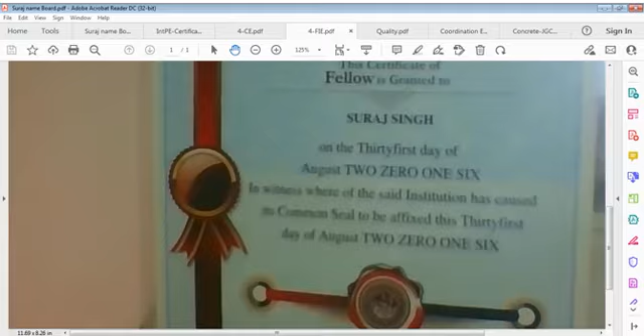And also this is Chartered Engineer certificate issued by Institution of Engineers and the provisions of Royal Charter of Institution of Engineers India 1935, and this is Membership Fellow FIE certificate, which is linked to corporate membership, which are AMIE, MIE and FIE. All titles are related to Chartered Engineer India use title.

Everybody has this authority to use, and this is quality file, which speaks of quality a lot. Quality is a must, and this is coordination file, and this is your reference file for standard specifications for concrete, and this relates to Japan specifications of concrete.

Meanwhile, I close this file Chartered Engineer India, and I also close this file Fellow of Engineers here, and I come back to quality issue, which is very important, and I talk on behalf of people of this country.

Bharat India speaks about. I'm not speaking on behalf of government, I'm not speaking on behalf of myself. I speak as far as quality is concerned on behalf of people of this country who must get quality for what they pay, but they are not getting.

And this is coordination issue, which means coordination engineering is a question mark, and engineering coordination both are same. Projects is talks of, and what we say that we must understand quality issue, we must understand what is quality, how it works, and what relation we have got.

And we say Bharat India speaks. And of course, if I say no, for timing I say Bharat India, I hide, and then I say quality and coordination. And quality and coordination are very important issues, which we can say, which apply.

These two issues apply everywhere, on every work, on every material, on every process in entire world. And I can say, of course, I can't say quality is not good everywhere. It may be good or may not be good.

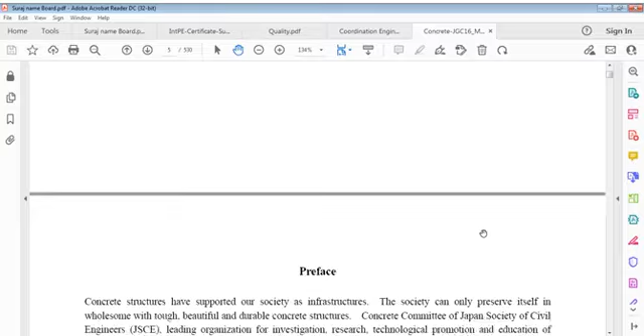For example, I by chance took this file, specification of concrete. This is a Japanese specification and it gives a lot of information—standard specifications for concrete structures, 2007, Materials and Construction, from the Japan Society of Civil Engineers. I was just referring this to you for additional knowledge. I have not gone through this file, but let us move on to understand what we can get from this. That information is very useful.

I talked to you about the index of this, and now we are somewhere here—what we are discussing in the first way. Yes, it was flow of work. We discussed planning related to design. Planning leads to designs, and designs lead to construction and maintenance.

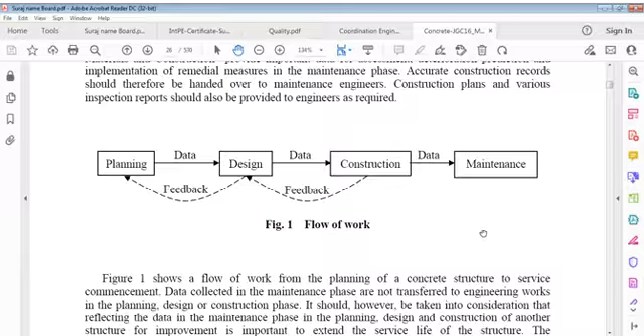Now, planning here is not project planning; it's a different kind of planning. We have to first decide what we have to do, and if in its initial stage we understand and can afford this project, then it's okay—we go to designs. When designs are ready, we go to construction, and once construction is ongoing, it goes to delivery of the project and maintenance. This is called flow of work, which is very common.

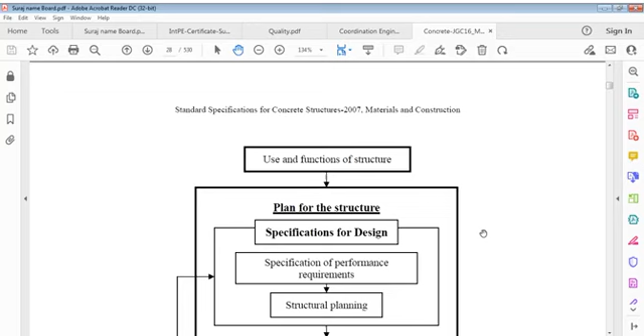There are standard specifications for structure design giving all these specifications which we can hand over. Also, this is a flow chart—our plan, which is the flow chart we discussed yesterday, of work steps described in specifications for designs. What is design specification? This was very clear.

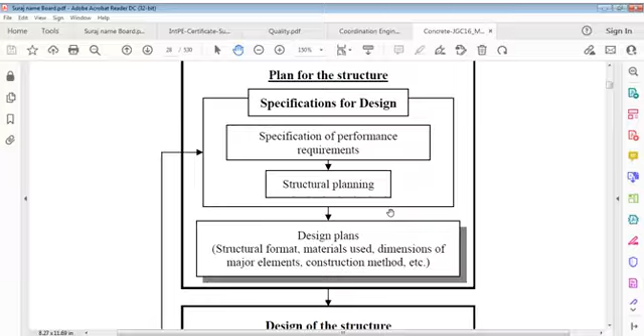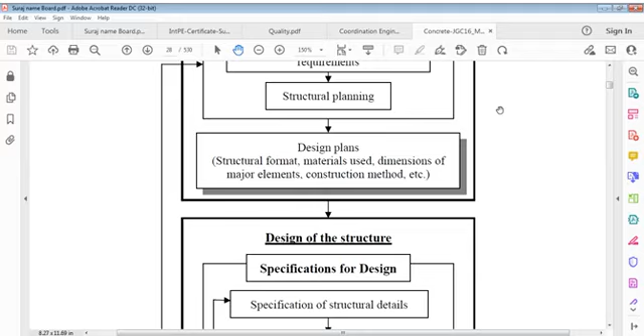You have to understand: the use and function of structure is the plan. It says that the plan for a structure, specifications for design—there you must have specifications of performance requirements, structural planning, and all these specifications for designs cover performance requirements and structural planning. Then it goes to structural planning, and after that to design plans, which means structural format, materials used, dimensions of major elements, construction method, etc.

Then we go to design of structure. Here is a plan for structure—meaning we planned in this way, using specifications for design, specifications of performance requirements, and structural planning, and we design plans. Then we go to design of structure. What should it be? How should it be?

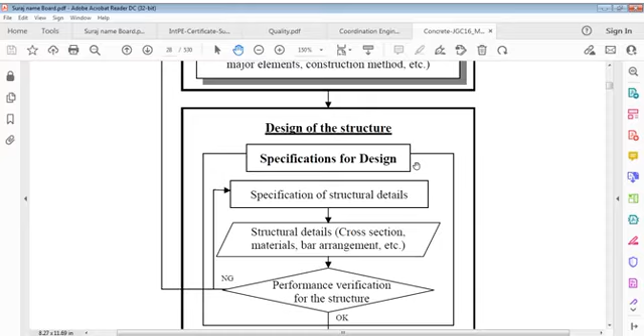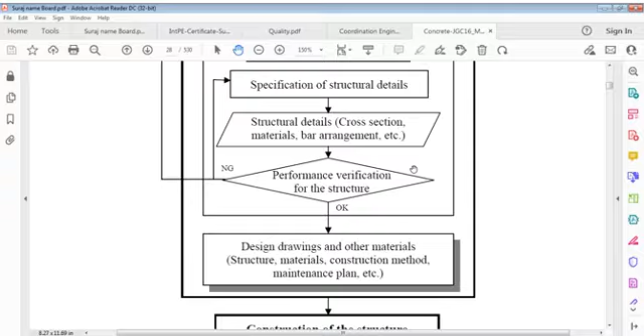Specifications for design must include specification of structural details, cross-section, materials, bar arrangement, and performance verification for structure—that's the coverage. Then once everything is known and performance verification is done, we produce the delivery item: design drawings and other materials, structure, materials, construction method, maintenance plan, etc. This then goes to implementation, called construction of structures. This is the work steps described in specification for design.

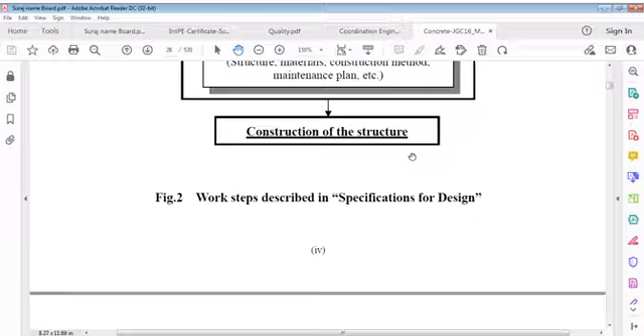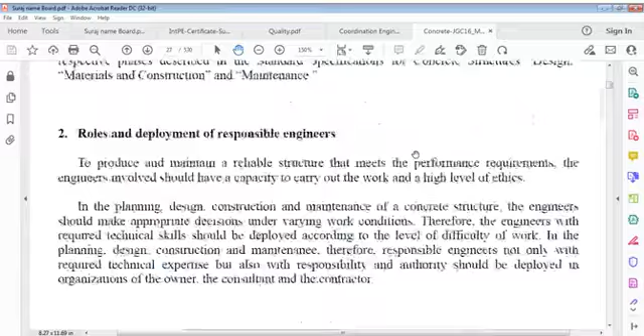Flow of work. In flow of work, we have gone through and understood the process of design, what the various processes are, and also the role and deployment of engineers, as we said. This is also a very important point, and it's important to say just in brief.

I remind you, engineers must produce and maintain a reliable structure that meets performance requirements. Engineers involved should have the capacity to carry out work and a high level of ethics in planning, design, construction, and maintenance of a concrete structure, making appropriate decisions under varying work conditions. Therefore, engineers with required technical skills should be deployed according to the level of difficulty of the work. Responsible engineers should have not only required technical expertise but also responsibility and authority, and should be deployed in organizations of owners, consultants, and contractors.

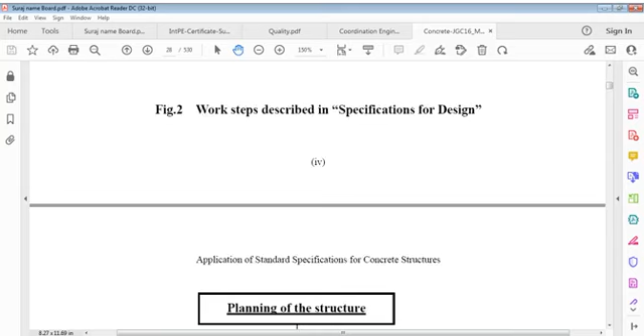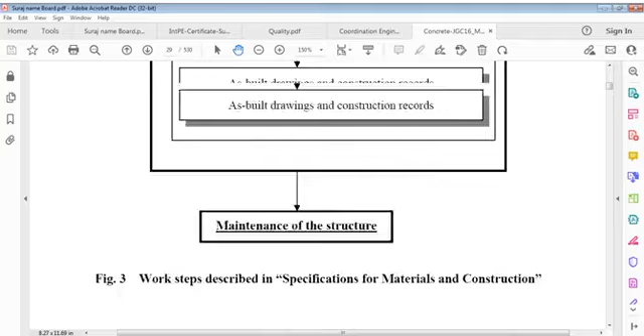And then we can say this is a design flow. After this, we go to planning of the structure. Then there's maintenance of the structure, and work steps described in specifications for materials and construction. Here, planning of structure we've done, design of structures we have done.

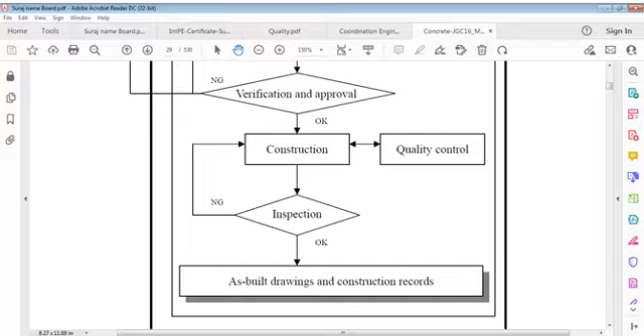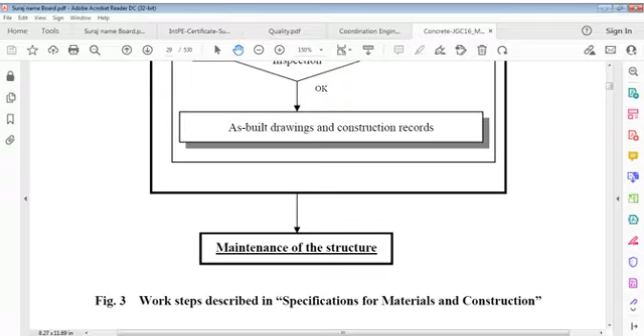Then we start construction of the structure, which covers specifications for materials and construction, planning, verification, and approval. After verification comes construction, which is also linked to quality as well as inspection, because inspection is generally a part of both construction and quality. Once constructed, we go to as-built drawings and construction records, which follow up. Then maintenance comes into view, and that's the flow.

The other part here in this graph is work steps described in specifications for maintenance. This means it's not construction, it's maintenance specifications. Though in our world of construction we don't often focus on it, it's still a part of the work. It says planning of structure, meaning design plans.

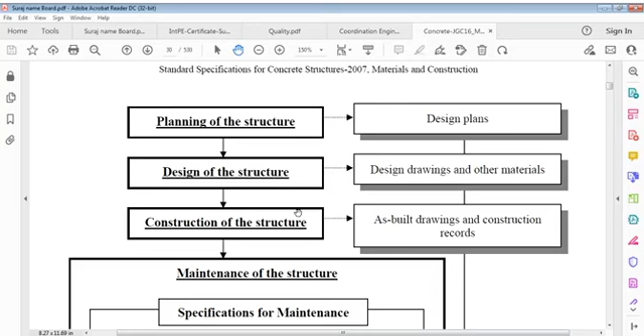Planning of structure gives you design plans. Design of structure gives you design drawings and other materials. Construction of structure gives you as-built drawings and construction records. So these are deliveries: design plan is a delivery, design drawings and other materials are a delivery, as-built drawings and construction records are deliveries. Design plans are delivered by planning of structure, design drawings and other materials by design of structure, and as-built drawings by construction of structure.

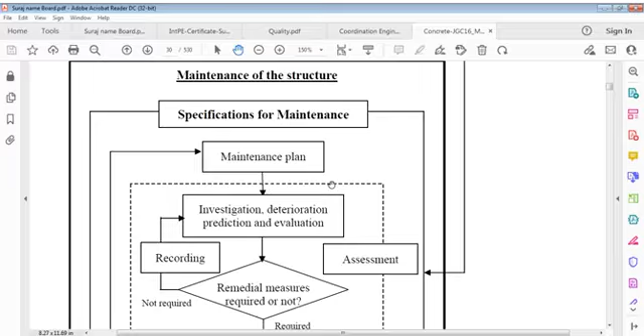Then it goes to maintenance of structure. Now we are talking of maintenance, which covers specifications for maintenance. What are these? Specifications of maintenance cover the entire scenario: investigation and deterioration prediction and evaluation, that is the maintenance plan - what shall we maintain. This takes us to remedial measures, required or not required, which it will tell us.

The investigation shall be based on records - we need recording here and assessment both. Then we determine what is required and what's not required - that's remedial measures, which we have to see in maintenance. It's necessary or not necessary depending on the age of the structure and how it works - whether it's new or old, or retrofitting is required, or rehauling is required, or a new structure is required. There's not just one remedial measure - there can be many, depending on so many factors. And we can say storage of maintenance records.

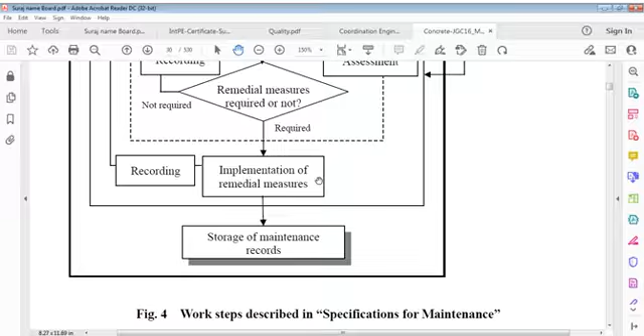Just like we say as-built records, we can say storage of maintenance records. What we maintain must be on record, so that it can be helpful in future - it's really useful. So that's work steps described in specifications for maintenance.

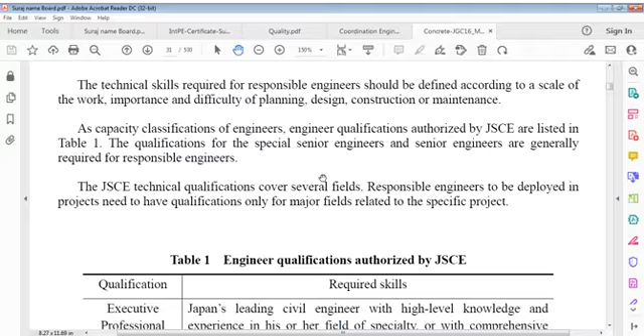Now, technical skills for engineers - what these must be, we have studied that. It should be engineer's qualification authorized by the Japan Society of Civil Engineers. What it should be: qualification for executive professional senior engineers, considered lead engineer or authorized engineer, then senior professional civil engineer, then professional civil engineer, and associate professional engineers. What are the expectations of society from them?

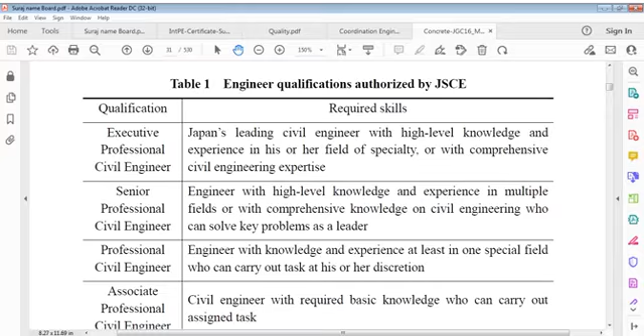Executive number one must be having the highest level of knowledge, and senior must have independent knowledge, multiple fields knowledge, as well as being a professional civil engineer with good engineer's knowledge and experience in at least one special field. An associate professional means someone with required basic knowledge, a civil engineer who can carry out assigned tasks - that's the start of life as a professional. Then you move to senior professional level with multiple fields experience, a kind of coordination engineer. Then the highest level is executive professional engineer, Japan's leading civil engineer, with high level experience in the highest field.

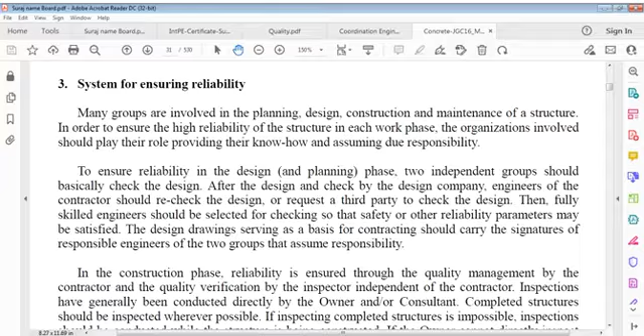That's just an indication of what level of competency one should have in a system for ensuring reliability, which is a very important part in the world of engineering. Without reliability, we can't do anything. Many groups are involved in planning, design, construction, and maintenance of a structure - it covers all these phases. In each workplace and each work phase, organizations involved should play their role, providing know-how, respecting know-how, and assuming due responsibility. Assuming due responsibility is the most important part.

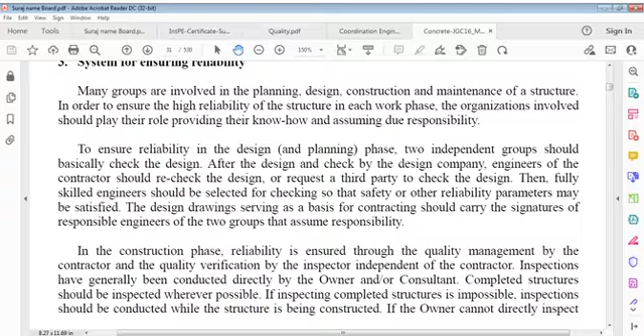To ensure reliability in the design and planning phase, two independent groups should basically check the design, so that it remains reliable with full confidence after design and check by the design company engineer, or engineer of the contractor. Engineers of the contractor should recheck once the design is delivered. The contract-employed engineer should recheck the design or request a third party to check it - we may call this a kind of review, proof checking, or reliability checking. Fully skilled engineers should be selected for checking so that safety or other reliability parameters may be satisfied.

Here we have design safety, work safety, and future safety - it's not just safety during work. Use safety means whatever we do, whatever product we deliver, in use it should be safe, and this should be for the entire life of that product.

Design drawings serving as a basis for contracting should carry signatures of responsible engineers of two groups that assume responsibility. That's an important part - it means it's not simply about checking, you also have to take responsibility for having gone through all this activity of checking or rechecking. You also become a stakeholder in this responsibility.

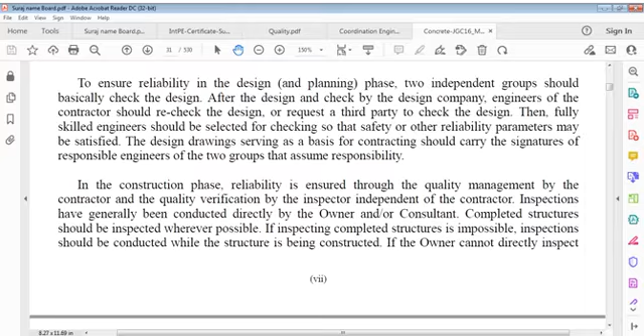In the construction phase, reliability is ensured through quality management by the contractor and quality verification by an inspector independent of the contractor. Inspections have generally been conducted directly by the owner or consultant. Completed structures should be inspected wherever possible. If inspecting the completed structure is impossible, inspection should be conducted while the structure is being constructed. If the owner cannot directly inspect the structure under construction, the owner may request an agent independent of the contractor.

Adopting as many highly reliable methods as possible can reduce the workers required for the work element required for quality organization, management, and inspection. In cases where adopting less reliable methods is inevitable, the level of quality organization management should be raised, or inspections should be conducted more frequently to improve reliability. Inspection items and decision criteria should be specifically presented at the time of contracting, because they greatly affect the quality of the structure and construction cost.

Ensuring safety requires regular investigations. When defects are detected, decisions should be made as to remedial measures. For decision-making concerning remedial measures for extremely difficult deformation, listening to the opinions of engineers with high skills who have experience in numerous cases is important. In order for a system for ensuring reliability to work properly, people or organizations with technical skills fit for specific work should be granted explicit responsibility and authority and assigned to the work.

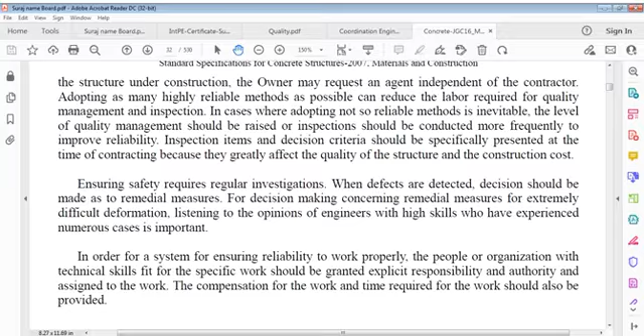Compensation for work and time required for work should also be provided.

General requirements. Now we come to general requirements. The contents of this book commence with chapter general provisions, which says standard specifications for concrete structures, that is materials and construction, general requirements, hereafter referred to as construction. General requirements of this specification describe basic concepts for construction of concrete structures specified in design drawings and specifications.

As a general rule, to construct a concrete structure, it is necessary to develop a construction plan based on design drawings and specifications provided. Within that contract, construct the structure in accordance with the construction plan while performing proper quality control or quality requirement compliance, and inspect the structure to confirm that it has been constructed in accordance with design drawings and specifications, and also good industrial practice. We can add that.

If it's not possible to develop a rational construction plan in accordance with design drawings and specifications, or whatever else is necessary to be included in that work, it is mandatory to revert or go back to the design stage and modify conditions set out in design drawings and specifications. This is very important content of this talk, a very important question. If your drawings and specifications are not implementable practically, that's a question mark.

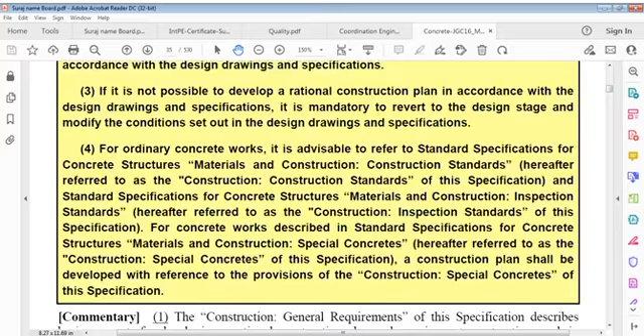Now a little commentary, let us see what it says. It says: construction, that is the general requirement of specification, describes basic concepts for developing a rational construction plan and carrying out construction work in accordance with the construction plan, in order to construct a concrete structure specified in design drawings and specifications, on the assumption that the structure has been designed appropriately so that performance requirements for the structure can be met.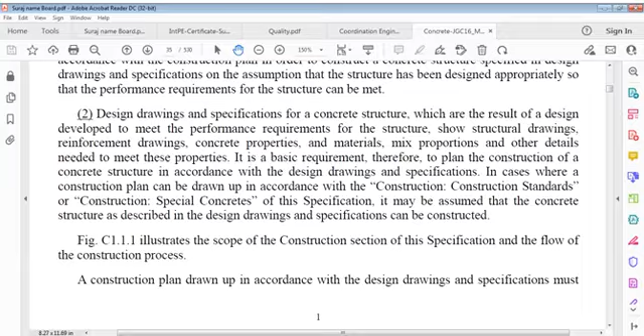Design drawings - this is about performance requirements for the structure to be met. This is an important point. Performance requirement means if it's not performable, there's no meaning to that. It is performable, that's what we say our target is. Design drawings and specifications for a concrete structure are the result of design developed to meet performance requirements for the structure.

Show structural drawings, reinforcement drawings, concrete properties and materials, mix proportions, and other details required to meet these properties. It is a basic requirement to plan construction of a concrete structure in accordance with design drawings and specifications. In cases where a construction plan can be drawn up in accordance with construction standards or Construction: Special Concretes specification, it may be assumed that concrete structures described in design drawings and specifications can be constructed.

There is a figure that illustrates the scope of construction. I will look at that after this.

A construction plan drawn up in accordance with design drawings and specifications must be confirmed and approved before construction is started. All tasks in the construction process must be performed in accordance with the construction plan after proper quality checks or quality examinations are done at each stage.

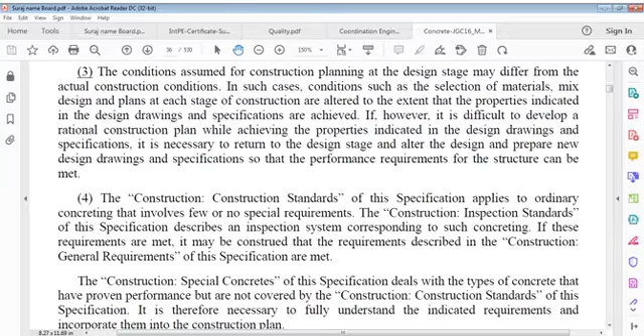Construction: Construction Standards of this specification apply to ordinary concreting that involves few or no special requirements. Construction inspection standards of this specification describe an inspection system corresponding to such concreting. If these requirements are met, it may be construed that the requirements described in the construction general requirements of these specifications are met.

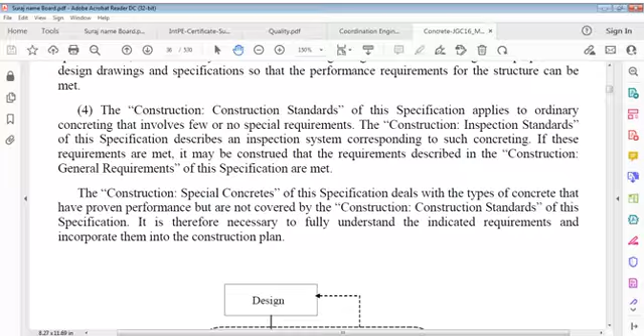Construction: Special Concretes in this specification deals with types of concrete that have proven performance but are not covered by the construction standard of this specification. It is therefore necessary to fully understand the indicated requirements and incorporate them into the construction plan.

Let's look at this figure. Here is design, and there is confirmed/approved, linked by a dotted arrow. Design goes to construction planning, and construction planning goes to confirmed/approved. These are linked together. There is also a larger dotted line covering many processes, in which confirmed/approved links to design and also to construction planning.

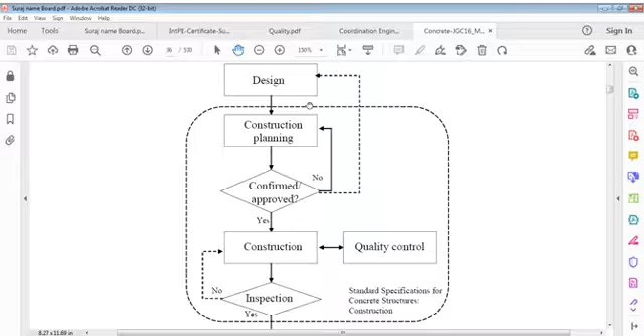If it is no, we have to go back to construction planning; if it can be done, we can say let us go to design. If construction planning is confirmed and approved, it goes to construction after yes, and construction is linked to quality control, and construction is linked to inspection directly. It goes back if it doesn't work.

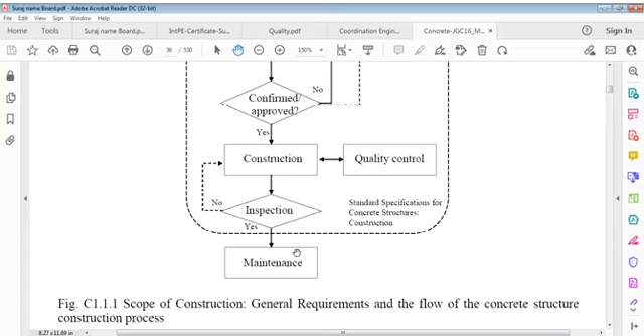Then it goes to maintenance after inspection, as per the standard specification for concrete structures construction: scope of construction, general requirements, and flow of the concrete structure construction process.

Now let's go to different definitions. Terms used in the standard specifications for concrete structures construction general requirements are defined as follows: verification, inspection, quality control, and domain engineer. Let us see one by one what it says.

Verification is the act of judging whether something meets performance requirements through experiments using full scale specimens, and through empirically and theoretically proven analysis methods. Inspection is the act of judging whether quality satisfies required criteria. Quality control refers to effective and organized technical activities for quality assurance of requirement performance performed at all stages of construction work, in order to economically construct a concrete structure that matches the required or intended purpose.

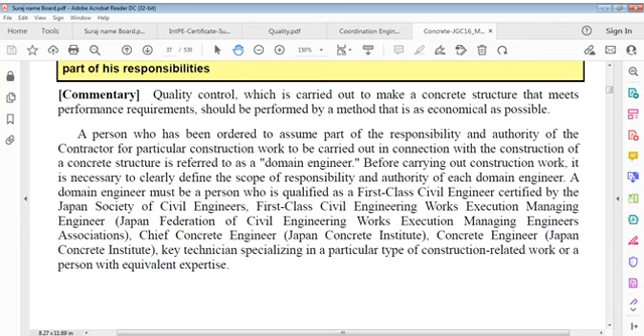Before carrying out construction work, it is necessary to clearly define the scope of responsibility and authority of each domain engineer. A domain engineer must be qualified as a first class civil engineer certified by the Japan Society of Civil Engineers, a first class civil engineering works execution managing engineer from the Japan Federation of Civil Engineering Works Execution Managing Engineers Association, a chief concrete engineer or concrete engineer from the Japan Concrete Institute, a key technician specializing in a particular type of construction related work, or a person with equivalent expertise.

Chapter 2, Construction Plan. What it says: an appropriate construction plan shall be prepared to construct a concrete structure indicated in design drawings and specifications. The construction plan shall meet requirements for the construction work concerned and be approved by the owner after it is confirmed that the concrete structure indicated in design drawings and specifications can be constructed.

So this is design approval in fact. This construction plan shall meet requirements for construction work concerned and be approved by the owner itself after it is confirmed that the concrete structure indicated in design drawings and specifications can be constructed.

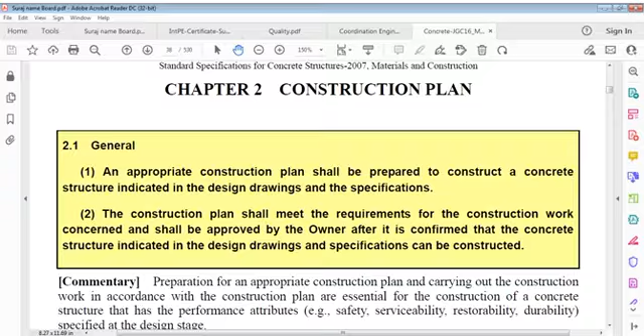There's a commentary on that also. Preparation of an appropriate construction plan and carrying out construction work in accordance with the construction plan are essential for construction of a concrete structure that has performance attributes, namely safety, serviceability, restorability, and durability, specified at the design stage. These are reliability coefficients, reliability attributes: safety, as we said before, serviceability, restorability, and durability, and in combination these can be called reliability.

This figure shows the flow of the process from design of a structure through development and approval of a construction plan to construction. In order to construct a concrete structure indicated in design drawings and specifications, appropriate concreting method and construction performance of concrete must be determined, and a construction plan is drawn up taking into consideration construction requirements, namely quality requirement, construction safety requirement, economy requirement, construction method or construction period, and environmental loading requirements.

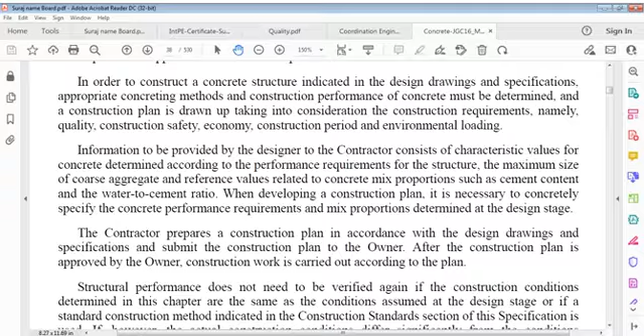When developing a construction plan, it's necessary to concretely specify concrete performance requirements and mix proportions determined at the design stage. The contractor prepares a construction plan in accordance with design drawings and specifications and submits that plan to the owner. After the construction plan is approved by the owner, construction work is carried out according to the approved plan.

Structural performance does not need to be verified again if construction conditions determined in this chapter are the same as conditions assumed at the design stage, or if a standard construction method indicated in the construction standards section of this specification is used. If, however, actual construction conditions differ significantly from conditions assumed at the design stage, performance of the structure must be verified again on the basis of actual construction conditions. If verification has revealed that the structure does not meet performance requirements, the construction plan requires to be altered according to the situation.

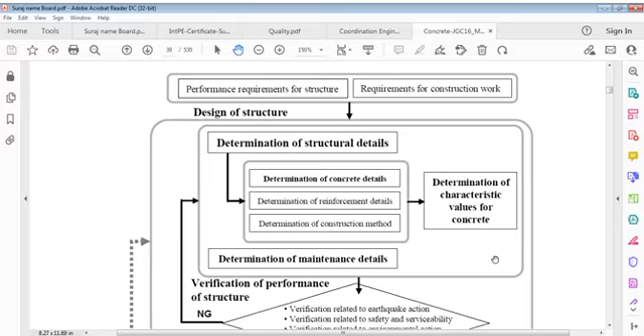Structural designs and construction planning, and this is here: performance requirements for structure and requirements for construction work, both. Performance requirements for structure and requirements for construction work are combined together, which goes to design of structure as overall and determination of structural details.

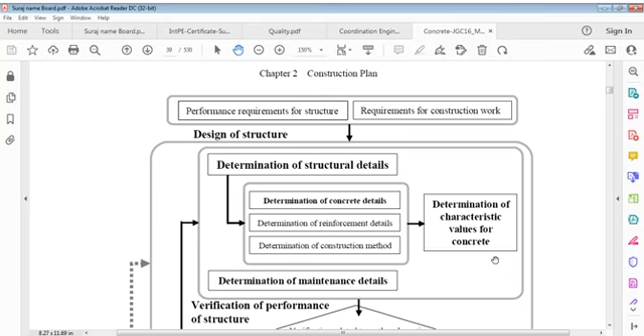Design of structure, and also you can say determination of structural details, which covers determination of concrete details, determination of reinforcement details, and determination of construction method. These three items go to determination of characteristic values for concrete. Determination of characteristic values for concrete. Now, determination of maintenance details.

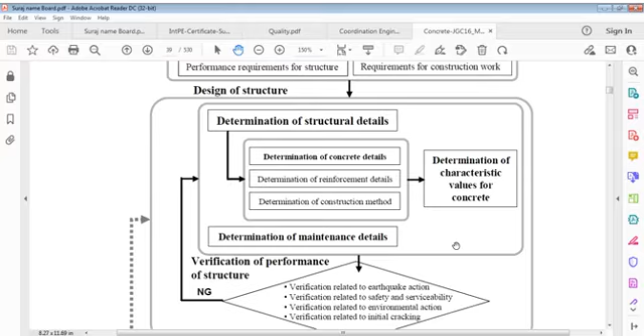This is for construction and designs, and this is for determination of maintenance details, which relate to design of structure and determination of structural details. It is verification related to earthquake action. Verification of performance is required, relating to earthquake actions, safety and serviceability, and environmental action related to initial cracking.

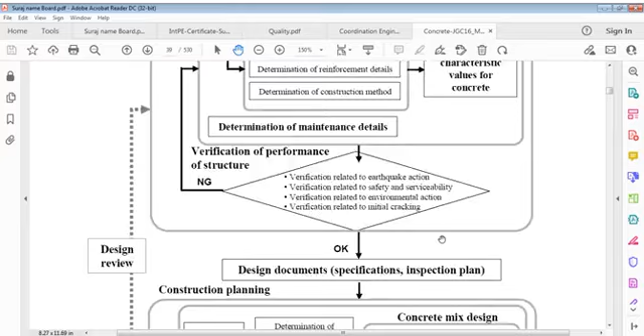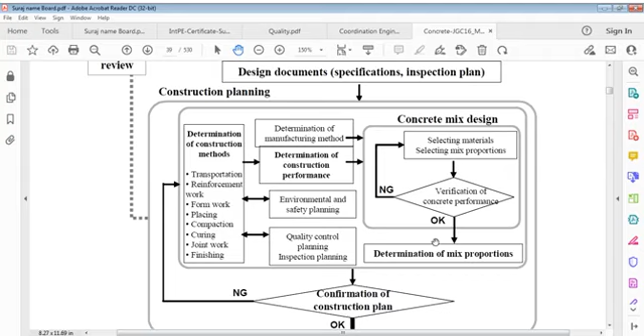These must be successful, and that is verification related to these items. If it is okay, it goes to design documents, specifications, and inspection plan, and all these come within the ambit of design review. This is linked above and below to design of structures, relating to design drawings, specifications, inspection plan, and construction planning.

After design documents, specifications, and inspection plan, it goes to construction planning. Here is determination of construction methods, which is linked to determination of manufacturing method, which is linked to concrete mix design. So determination of construction method, which is linked to determination of construction performance.

Determination of construction methods include transportation, reinforcement work, formwork, placing, compaction, curing, joint work, finishing. Construction methods: transportation, reinforcement work, formwork, placing, compaction or consolidation, curing of concrete, joint work, and finishing.

Determination of construction performance is linked to concrete mix design also. Determination of manufacturing method links to concrete mix design also. Then other items: environmental and safety planning, preparatory items, and post-concrete items like curing, compaction, joint work, finishing, all related to quality control planning and inspection planning.

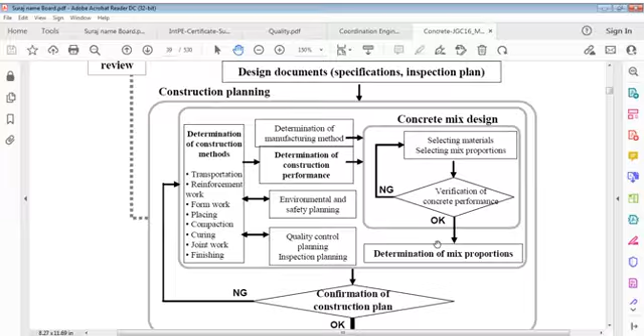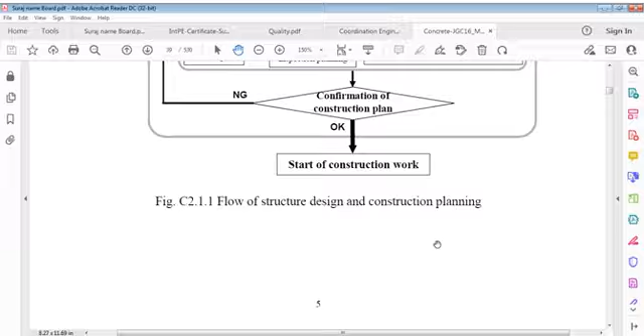Ultimately, concrete mix design involves selecting materials, selecting mix proportion, and verification of concrete performance, which after confirmation goes to determination of mix proportions, and confirmation of construction plan. Then we give final approval to start construction works. This is the flow of structural design and construction planning.

Considerations in construction planning. The construction plan shall be prepared taking into consideration environmental conditions and construction conditions at the construction site.

Giving consideration to construction safety and environmental loading, and developing plans for details such as overall schedule, construction methods, concrete manufacturing methods. There are four items here: overall schedule with many levels of tasks, construction methods, concrete manufacturing methods, construction performance of concrete, concrete mix proportions, quality controls, inspection, environmental impact and safety.

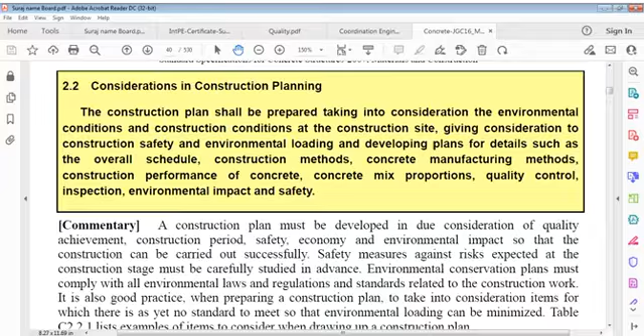There's a commentary also everywhere, let's see what it says - it can give much more benefit to make clear all these points. A construction plan must be developed in due consideration of quality achievement, construction period, safety, economy, and environmental impact, so that construction can be carried out successfully.

Safety measures against risks expected at the construction stage must be carefully studied in advance. Environmental considerations and environmental conservation plans must comply with all environmental laws and regulations, as well as standards related to construction work. It's also good practice when preparing a construction plan to take into consideration items for which there is as yet no standard to meet, so that environmental loading can be minimized.

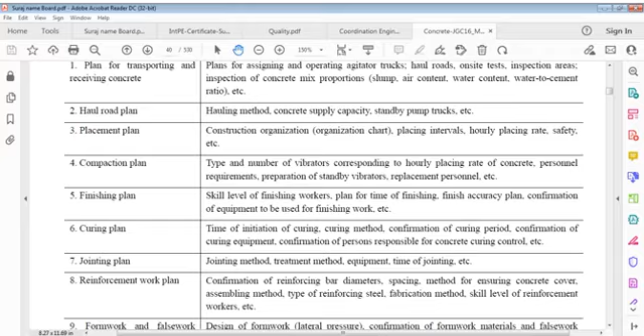There are certain examples here of items to consider when drawing up a construction plan. Examples of considerations in construction planning: plan for transporting and receiving concrete, haul road plan, placement plan, compaction plan, finishing plan, curing plan, jointing plan, reinforcement work plan, formwork and falsework plan, environment conservation plan, safety and health plan, others - about 12 items.

Same points as discussed before. This item is plan for transporting and receiving concrete - this is construction planning. Plans for assigning and operating agitator trucks, haul roads, on-site tests, inspection areas, inspection of concrete mix proportions, slump, air content, water content, water to cement ratio. Then haul road plan for concrete, hauling method, concrete supply capacity, standby pump trucks, etc.

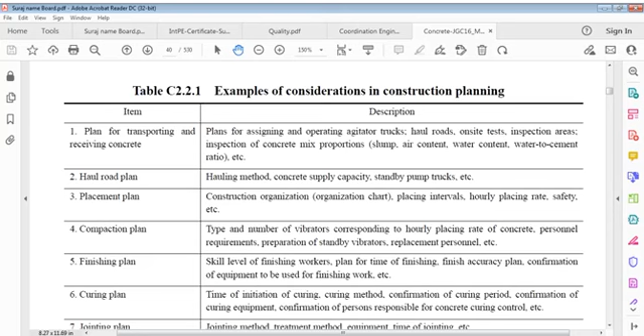In placement plan: construction organization, organization chart, placing intervals, hourly placing rate, safety, etc. That is the placement plan. Then compaction plan: type and number of vibrators corresponding to hourly placing rate of concrete, personnel requirements, preparation of standby vibrators, replacement personnel, etc.

Compaction plan it is. Then finishing plan: skill level of finishing workers required, time of finishing, finish accuracy plan, confirmation of equipment to be used for finishing work, etc. Then curing plan.

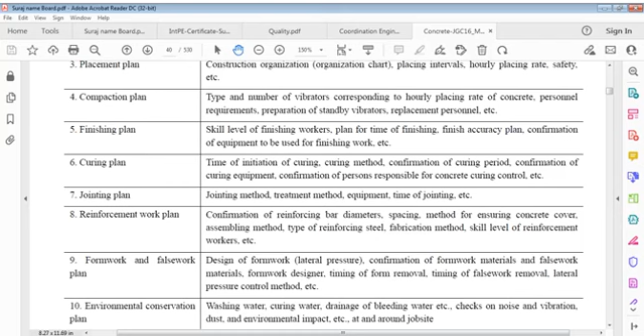See, every activity is planned here. Time of initiation of curing, curing method, confirmation of curing period, confirmation of curing equipment, confirmation of persons responsible for concrete curing control, etc. Then jointing plan: jointing method, treatment method, equipment, time of jointing, etc.

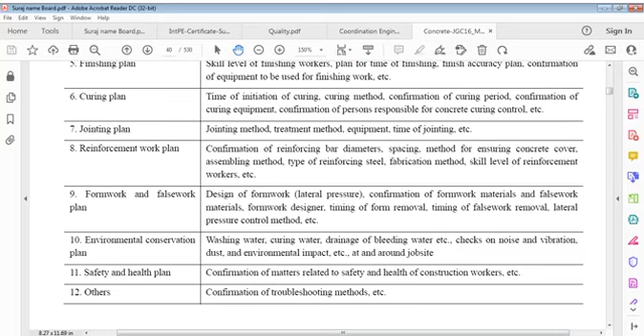Reinforcement work plan: confirmation of reinforcing bar diameters, spacing, method for ensuring concrete cover, assembling method, type of reinforcing steel, fabrication method, skill level of reinforcement workers, etc.

Formwork and false work: design of formwork, that is lateral pressure, confirmation of formwork materials and false work materials, formwork designer, timing of form removal, timing of false work removal, lateral pressure control method, etc. There's also environmental considerations in this same plan.

Environmental conservation plan: washing water, curing water, drainage of bleeding water, etc. Checks on noise and vibration, dust and environmental impact, etc., around the job site. Safety and health plan: confirmation of matters related to safety and health of construction workers.

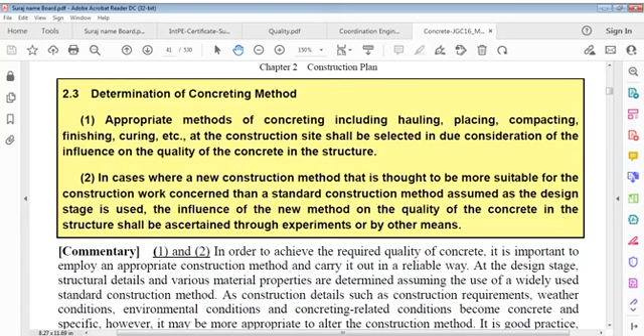In cases where a new construction method, thought to be more suitable for the construction work concerned, is used instead of the standard construction method assumed at the design stage, the influence of the new method on quality of concrete in structure shall be ascertained through experiments or by other means.

This is about the concreting method. As above, in order to achieve the required quality of concrete, it is important to employ an appropriate construction method and carry it out in a reliable way.

At the design stage, structural details and various material properties are determined, assuming use of a widely used standard construction method.

However, as construction details such as construction requirements, weather conditions, environmental conditions and concreting related conditions become concrete and specific, it may be more appropriate to alter the construction method. It's good practice, therefore, to take a flexible approach and select the most appropriate method in view of the conditions of the construction project. Decisions on construction methods in such cases may be made with reference to construction methods described in the construction standards section.

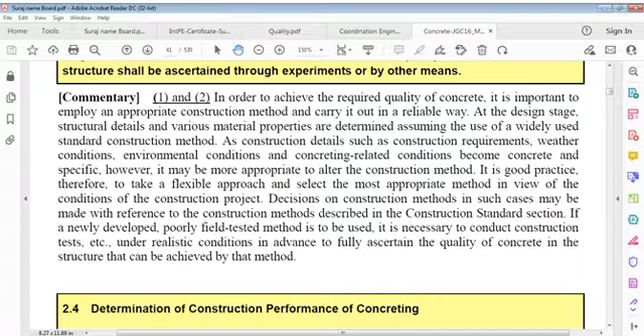Determination of construction performance of concreting. Appropriate construction performance of concrete shall be specified according to the construction method to be used. If construction performance of concrete cannot be specified, previously determined details such as construction method shall be reconsidered.

Commentary. This time is 6:10. Okay.

Construction performance of concrete includes workability, such as filling ability and pump ability, setting properties, and strength development. That is, pouring first, then setting properties and strength development properties.

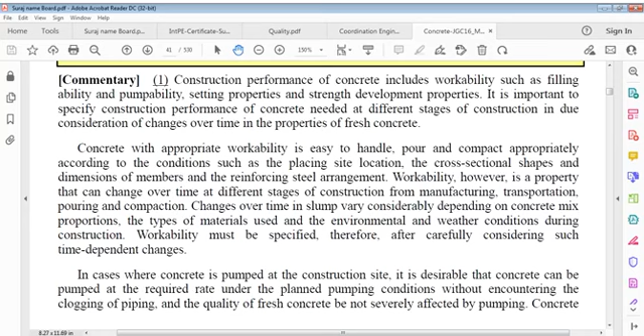Workability must be specified. Therefore, after carefully considering such time dependent changes, in cases where concrete is pumped at the construction site, it is desirable that concrete can be pumped at the required rate under planned pumping conditions without encountering clogging of piping, and quality of fresh concrete not be severely affected by pumping.

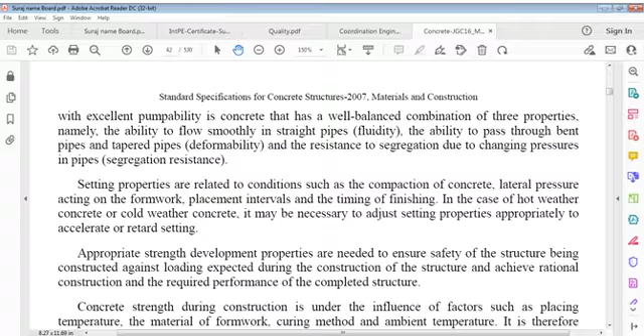Concrete with excellent pumpability has a well balanced combination of three properties: the ability to flow smoothly in straight pipes, called fluidity; the ability to pass through bent pipes and tapered pipes, called deformability; and resistance to segregation due to changing pressures in pipe, called segregation resistance.

Setting properties are related to conditions such as compaction of concrete, lateral pressure acting on formwork, placement intervals, and timing of finishing. In case of hot weather concrete or cold weather concrete, it may be necessary to adjust setting properties appropriately to accelerate or retard setting.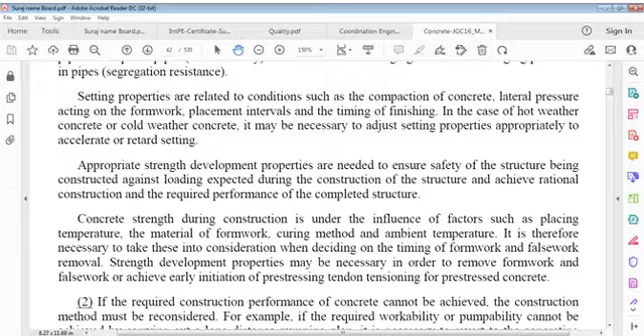Appropriate strength development properties are required to ensure safety of the structure being constructed against loading expected during construction, and to achieve rational construction and required performance of the completed structure.

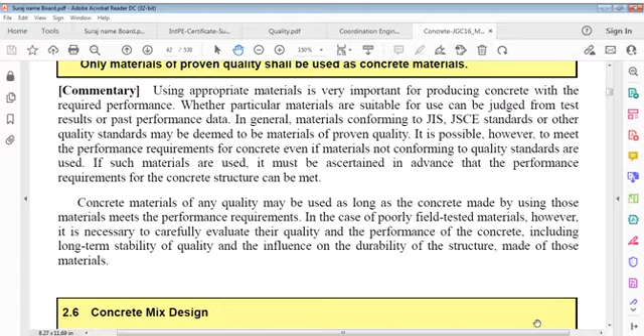It's possible, however, to meet performance requirements for concrete even if materials not conforming to quality standards are used. If such materials are used, it must be ascertained in advance that performance requirements for the concrete structure can be met. Concrete materials of whatever quality may be used as long as concrete made using those materials meets performance requirements. In case of poorly field tested materials, however, it is necessary to carefully evaluate their quality and the performance of concrete, including long-term stability of quality and influence on durability of structures made of those materials.

Concrete mix design: concrete mix proportions shall be determined taking into consideration such factors as constraints, related concrete plants, availability of materials, and economy, including transportation cost, so that required performance of concrete can be achieved.

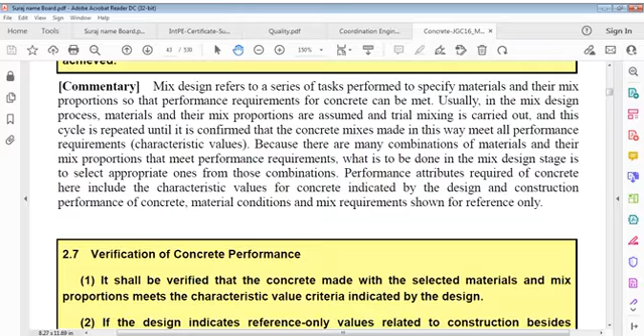Mix design refers to a series of tasks performed to specify materials and their mix proportions so that performance requirements for concrete can be met. Usually in the mix design process, materials and respective mix proportions are assumed and trial mixing is conducted, and this cycle is repeated until it is confirmed that concrete mixes made this way meet all performance requirements and characteristic values. Because there are many combinations of materials and mix proportions that meet performance requirements, what is to be done in the mix design stage is to select appropriate ones from these combinations.

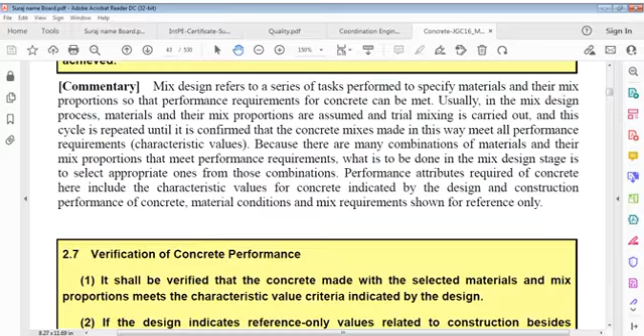Performance attributes required of concrete here include characteristic values for concrete indicated by design, and construction performance conditions and mix requirements shown for reference only. Verification of concrete performance shall confirm that concrete made with selected materials and mix proportions meets the characteristic value criteria indicated by design. If the design indicates reference-only values related to construction besides characteristic values, it shall be verified that selected materials and mix proportions meet those reference-only values, or meet the concrete performance requirements on which the reference-only values are based.

Commonly used methods of concrete performance verification as of this writing include experiment-based methods and methods of making inference from past performance data. Characteristic values for concrete to be verified include strength and carbonation rate.

What are the characteristic values for concrete that we have to verify? They include strength, carbonation rate coefficient, and diffusion coefficient of chloride ions. Carbonation rate coefficient tells us how fast or slow carbonation progresses. Diffusion coefficient of chloride ions means how much chloride ions spread into and penetrate the concrete. Also included are freeze-thaw resistance, chemical attack resistance, alkali-silica reaction resistance, water permeability coefficient, fire resistance, and drying shrinkage strain.

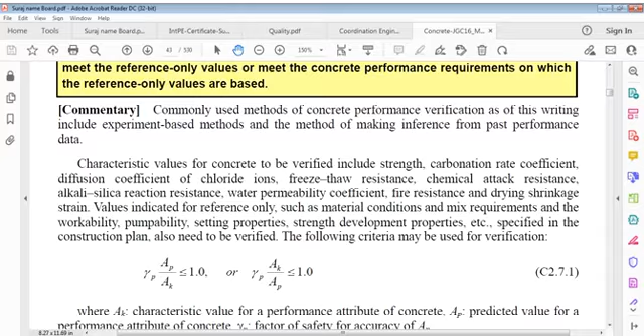There is a criteria that can be used here. The formula is gamma P times AP over AK, which should be less than or equal to 1, or equivalently, rearranging terms, gamma P times AK over AP is less than or equal to 1, where AK is the characteristic value for a performance attribute of concrete, and AP is the predicted value for a performance attribute of concrete. Gamma P is the factor of safety for accuracy of AP, that is, the predicted value.

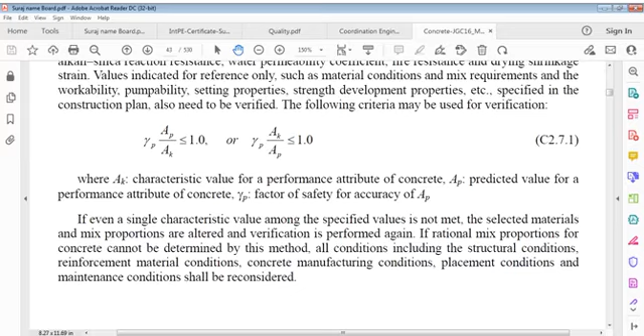If even a single characteristic value among specified values is not met, selected materials and mix proportions are altered and verification is performed again. So these factors are gamma P, the factor of safety for accuracy of AP, the predicted value, and AK, the characteristic value. These three parameters work together in a ratio reversal form, in a division reversal form, and this tells us whether even a single characteristic value is met.

If even a single characteristic value among specified values is not met, selected materials and mix proportions are altered and verification is performed again. If rational mix proportions for concrete cannot be determined by this method, all conditions including structural conditions, reinforcement material conditions, concrete manufacturing conditions, placement conditions, and maintenance conditions shall be reconsidered.

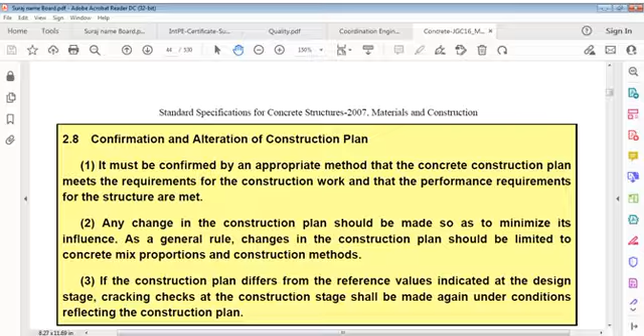And comments: the construction plan must meet requirements for construction work, and must be such that the concrete structure built in accordance with the plan meets performance requirements. The contractor submits a construction plan in writing to the owner, and the owner checks it.

The contractor submits a construction plan in writing, and owner checks whether the structure shown in design drawings and specifications can really be constructed, and approves the construction plan. To be more specific, it is necessary to check each task in accordance with items and descriptions shown in the table we discussed, to determine whether standard construction methods specified in the construction standards of this specification are used, whether the plan has an adequate margin of safety against variable factors expected in connection with each task, and whether the plan incorporates troubleshooting methods, etc.

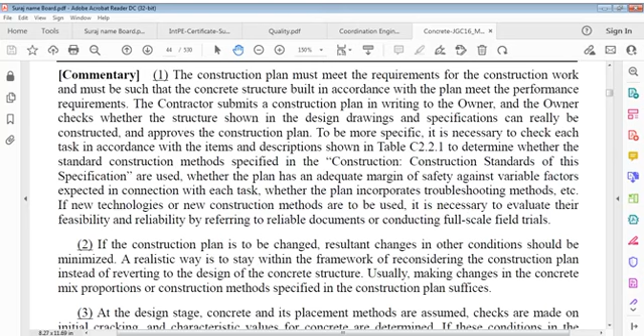If new technologies or new construction methods are to be used, it is necessary to evaluate their respective feasibility and reliability by referring to reliable documents or conducting full-scale field trials.

If a construction plan is to be changed, resultant changes in other conditions should be minimized. A realistic way is to stay within the framework of reconsidering the construction plan instead of reverting to the design of the concrete structure. Usually, making changes in concrete mix proportions or construction methods specified in the construction plan suffices.

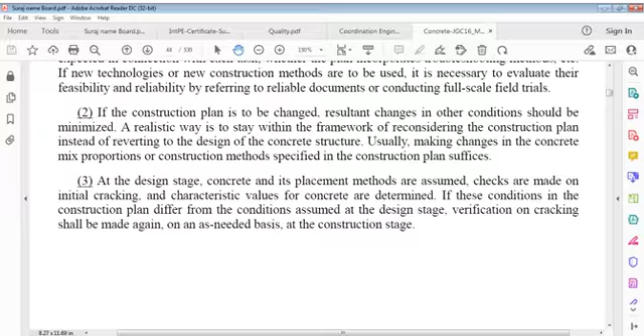At the design stage, concrete and its placement methods are assumed. Checks are made on initial cracking and characteristic values for concrete are determined. If these conditions in the construction plan differ from conditions assumed at the design stage, verification on cracking shall be made again on an as-needed basis at the construction stage.

Chapter 3, Construction.

Construction of a concrete structure shall be carried out in accordance with the construction plan. Construction of a concrete structure shall be carried out under supervision of a domain engineer with sufficient knowledge and experience in construction of concrete structures, stationed at the construction site.

In our language, in English or other countries' languages, domain engineer can also be called discipline engineer. I think it's the same, it's no problem. I understand it is the same, but use domain engineer if you like it, no problem.

If the construction plan cannot be followed at the construction stage, appropriate measures shall be taken so that performance requirements determined at the design stage can be met.

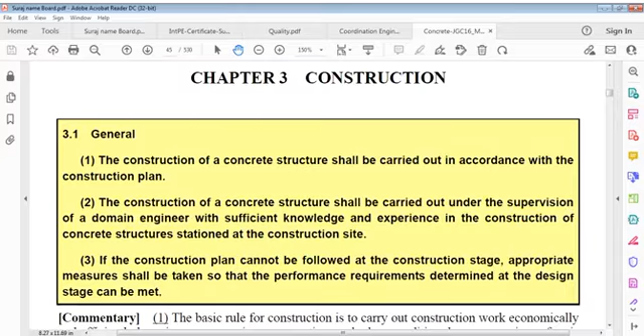And we see the commentary on that. The basic rule for construction is to carry out construction work economically and efficiently by using an appropriate construction method, on condition that construction safety is maintained.

Because concreting work involves a variety of tasks, such as tasks related to formwork, reinforcing steel, and placing of concrete, it is desirable that concreting work be thoroughly coordinated with other types of work so that construction work can be carried out efficiently.

To construct a concrete structure, the constructor prepares a construction plan that details necessary construction processes based on design drawings and specifications. Construction of a concrete structure therefore must be carried out in accordance with the construction plan.

In general, quality of construction is heavily dependent on human factors such as experience and qualities of constructors. It is very important, therefore, to station domain engineers with sufficient knowledge and experience in the field of construction of concrete structures at the construction site, so that construction work is carried out under the direction of those domain engineers.